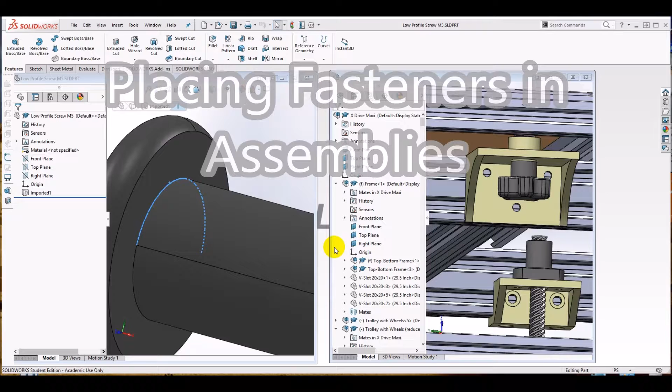Sometimes when you're creating a complex assembly, you have the need for many fasteners of the same kind. If they happen to all be on one plane, you can do a copy with mates, but in this instance I have holes all over the place, and so far the best way I've found to add this screw on the left to all the various holes is to do them one at a time, but at least there is some level of automation available.

If you click on the underside as I am doing here, you can drag that fastener, and you have to be careful where you drop it. You can drop it reference to holes that are shown in the assembly on the right. Once it has taken that one, I can then bring another instance over, and again it takes some practice to find the proper snapping point, but in doing so it's at least considerably quicker than if you had to create the two constraints manually, those being the concentric and

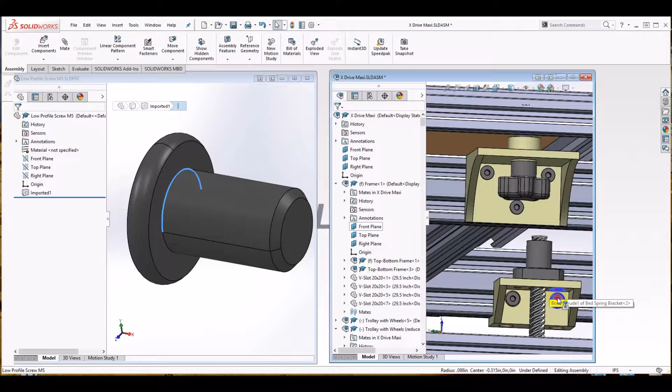coincident constraints that a screw would need. In essence, that's what this is doing. It's creating an instance of that hardware in the assembly and then creating the two constraints automatically. And as you can see, in a fairly short time, I won't call this highly automated, but I have a good deal of control over all the holes.

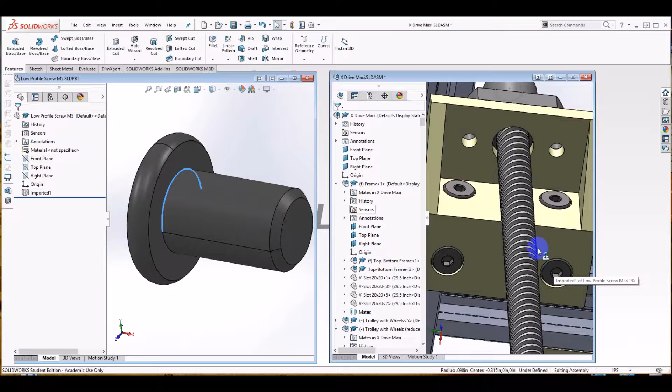As you see, I've been adding them one at a time to the holes in this bracket, and then once I've finished that particular bracket, I can easily enough scroll around to another similar instance and do the very same thing all over again. This particular assembly has quite a few such brackets on it that are all mounted to...

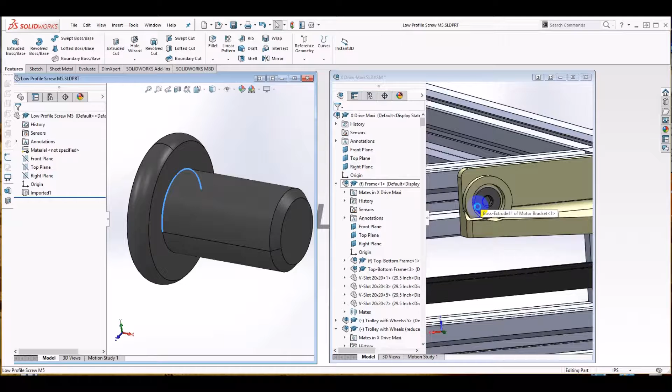Here's another instance right here. So again, I take the screw and bring it over and drop it into place, and once it's finished doing that job, it will show it in position. There we go. I've noticed a little bit of weirdness occasionally on the repaints, but in effect it's dramatically quicker to do this, what I'm doing right now, than it is to try to individually do the screws one at a time.

So I hope this is useful to you, and if you happen to find a better way, something that is even more automated, I would appreciate you letting me know.